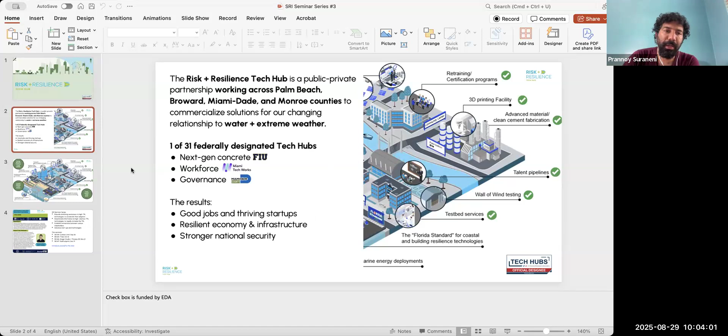Broadly speaking, we work on next generation concrete, workforce, governance, although it's like trying to do your entire thesis in 3 minutes. We are doing a lot of different things. I'm not going to go into details of all of that, but feel free to reach out to us and I'm happy to tell you. Ultimately, this is going to result in economic development, good jobs, many jobs, thriving startups, resilient economy, resilient infrastructure. It's going to result in stronger national security as well.

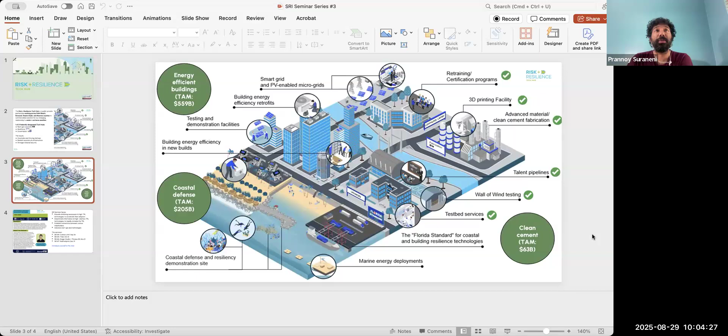What are the areas that we're working on? Broadly speaking, the Tech Hub is interested in energy efficient buildings, in coastal defense, and in clean cement. And as you can see, this is an entire ecosystem here, going all the way from into the water to significantly into the land, and the details of the many things that we are interested in doing are here. If this is something of interest, something that you want to support, something that you want to take part, please let us know.

The objective of this seminar series specifically is to educate and bring awareness to high TRL technologies so that their adoption can be accelerated. It is to disseminate information on both high and low TRL technologies to increase the TRL. It is to establish connections between the various stakeholders, right? All of you on this call, and to advance startups and technologies that enhance national defense, enhance resilience, all of that for the region, but ultimately for the rest of the United States as well.

So these are the rest of the seminars. I'll provide more information about them as the time comes. But for now, and I realize I have an old version of this here, I apologize. Title here is not the title of Charlotte's talk. But Charlotte Hoffman, who leads strategy and innovation at Kind Designs, is going to talk about their living seawall system and how the system restores marine habitats while protecting coastal communities.

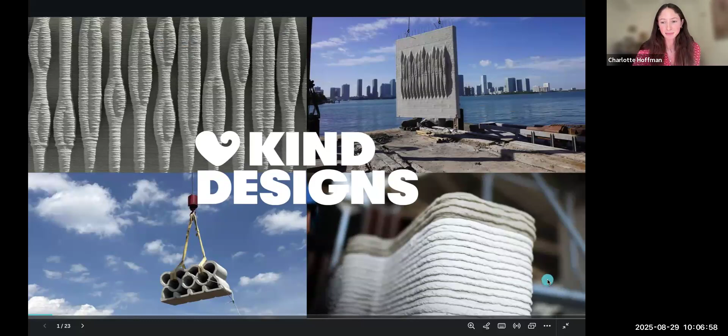There we go. Okay, so we got started about 2 years ago with the goal of creating a global scalable solution for climate change, sea level rise, and flooding. And the first things that we looked at were existing solutions of how coastal communities are traditionally combating these issues. And of course, we looked at seawalls being the first man-made defense between land and sea, typically in a coastal urban environment.

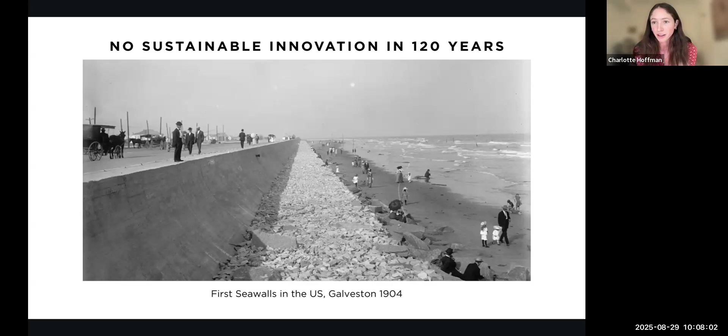And what we found is that seawalls all have the same kind of two problems. One is that they reflect wave energy, and so it leads to scour and erosion at the base of the seawall and overtopping of water behind the seawall, which both create structural issues and can potentially lead to premature failure of the seawall. But then two is that they destroy marine habitat.

So you're replacing what would be a dynamic coastal ecosystem in South Florida, maybe a mangrove forest, with just a flat wall that can never hold the same amount of biodiversity and life that a natural coastal ecosystem could. And the White House did a study and they found that within the next 15 years, so 2040, we'll actually be replacing about 50,000 miles of habitat with seawalls.

And that's a huge deal because there was actually a University of Miami study that was looking at seawalls and their impact and found that when you install a seawall, you lose 45% of the biodiversity within 1 year of installation. And that has a compounding effect because as you destabilize the ecosystem, it becomes harder and harder for it to recover.

So with the projected seawall construction happening in the next 15 years and obviously continuing after that, and the impact that has on biodiversity, we wanted to create something that could function, one, as a better seawall structurally and better protect communities, but also that could better protect the environment, since right now seawalls don't seem to be going anywhere. So that's when we came up with living seawalls. What if we can create a seawall that can actually house marine habitats and also provide some more structural benefits than a traditional seawall as well?

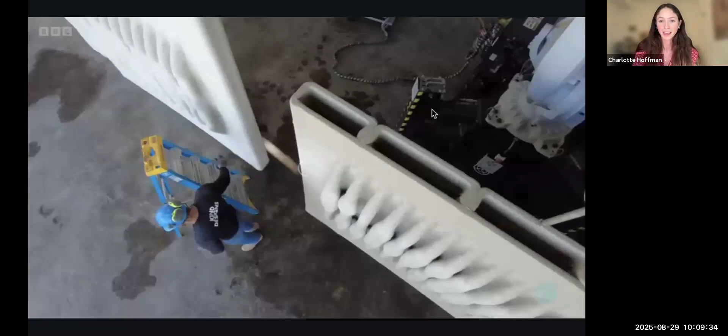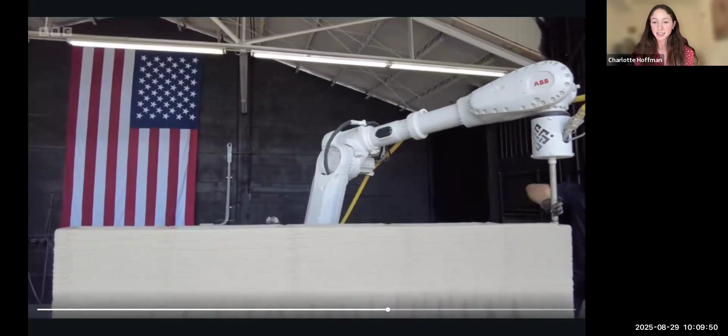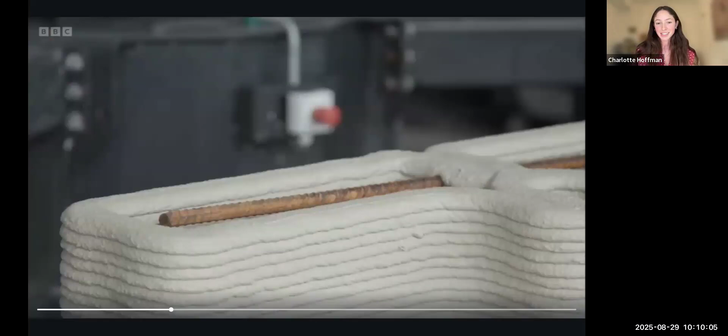So here's an example of us 3D printing one of our living seawalls. The method of manufacturing was chosen purely based on what our goals were. 3D printing allows us to create extremely intricate and unique customized designs. We wanted to take a biomimicry approach, again, to mimic what the natural coastline might offer in terms of habitat. So this is an iteration of our mangrove root design for any of our South Florida projects, but bringing our technology to other regions, other states, we can do a totally different design that mimics that natural coastal environment.

So obviously with new technology, a lot of times the hardest thing, even if it's a great idea, is just getting adoption. So we were really focused on how do we get everyone to start using living seawalls and replace all toxic traditional seawalls with a living seawall. And the way that we thought about doing that was just to fit into the existing regulatory and permitting environment.

So just on the regulation side for seawalls, we obviously looked at the building code and said, okay, what are the specifications and requirements, mainly having to do with the strength of the concrete and rebar placement. And so our seawall, we 3D print the exterior, which you saw in that video. We add rebar in the interior, and then we fill it with traditional ready-mix concrete that all marine contractors use to pour for a traditional precast concrete seawall. So right away, we can fit in with the existing building code.

Again, with 3D printing, it's totally customizable, so we can match the exact dimensions that an engineer specifies for the project. We can change the rebar in the interior to match the project specs. And then the material we're using is also not necessarily novel at all. It's a 3D printed extrudable mortar. It's a 5,000 PSI mix. So at the end of the day, it's quite similar to a traditional seawall.

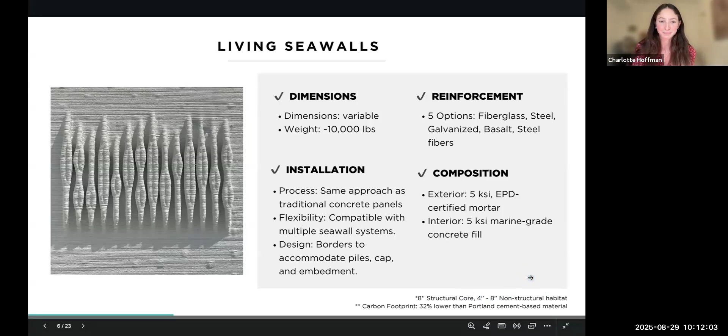Instead of using wooden formwork to form and pour a precast slab, we kind of create this quote unquote formwork with the 3D printed exterior and then fill that with your traditional ready mix. So really fitting immediately into the building code so that at least you can permit this project. And then again, on the permitting side, because we fit into the building code, something I'll talk about a little bit more in a second is that in Miami, up until about a month ago, 2 months ago now at this point.

It used to take 2 years to get a seawall permit. We actually just passed some legislation that has since changed that to 90 days. But as a company, we're only 2 years old and we have 9 projects in the water. If it takes 2 years to get a permit, how is that even possible? It's because we can customize our product to meet the exact dimensions of plans that have already been permitted without needing a modification.

So this is just an example. Obviously, these are some engineering plans with a lot of words on the screen, but just to show you, on the left side, we have the original permit of our first project that we did in Miami Beach. On the right, it's the shop drawing that we submitted. Since they're both concrete, it was a one-to-one swap, just a plug-and-play solution. And the homeowner didn't need to apply for a new permit to install this. So we installed this seawall literally just 4 months after we got our first robot.

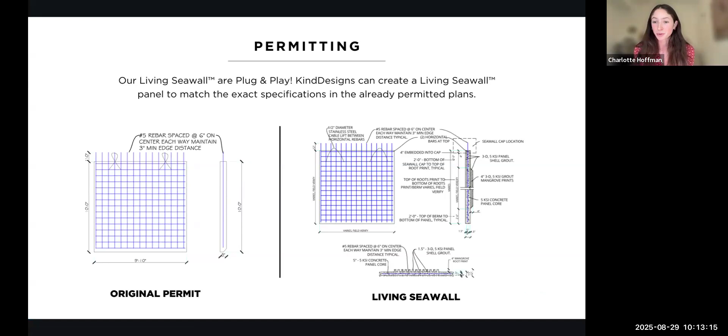And then lastly, again, to help with adoption, we needed to make sure that installation was exactly the same. The marine contractors having buy-in to our product is hugely important because at the end of the day, you typically buy a seawall from a marine contractor, but now you'd be buying it from us and they would be doing the installation. So we really wanted to make the marine contractor's life easier, one, by just making the panels ourselves.

Right now, it takes a long time to get a concrete seawall because the manufacturing process being horizontal versus vertical just limits how many panels you can make at a time, especially if you're forming and pouring panels on site. There's typically not a lot of room if it's not a commercial or government project to actually pour panels on site. And then you have to let them cure for 28 days.

But with us, we can actually just 3D print this wall in just an hour for a 10 by 10 foot seawall panel, which is your typical size in Miami-Dade County, and then fill it 24 hours later. So we have enabled contractors to actually complete a lot more projects because there's not as much waiting time to actually precast these panels.

But then again, on the installation side, it's the same exact installation as a traditional precast concrete seawall. They don't need to get any special equipment to be able to install our precast concrete or our 3D printed living seawalls. And you can use the same exact installation methods: king and batter piles, tiebacks, deadman anchors, helical anchors. So again, really just making it as easy as possible for people to adopt this solution without needing to necessarily change regulation, even though we also did that.

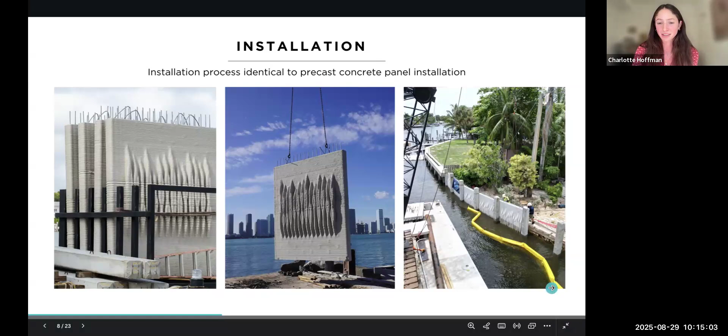So here's just an example of a project being installed. This was our first project in Broward County. This is in Fort Lauderdale. We actually presented to the Marine Advisory Board, and one of the women at the meeting needed a new seawall. So this happened about 8 months later, which is awesome. Another project is our first project in Miami Beach. You can see here.

So the other part of adoption is obviously, with new technology, proving that it works. And so that's where academic partnerships have been extremely valuable to us. So we've done a lot of work with UM and with FIU. Here you can see photos from monitoring that we've done, and this was all with FIU, with Alastair Harborne, who's on the call, and PhD student Emily Jackson, who have done an amazing job diving at 3 of our walls every single month, and taking amazing footage of the sites and fish that are in the area.

So just on the design side, how do we actually attract more species? One, we have the microhabitat, which is the rugosity created by the 3D printing process. So we create all these textures that you don't get on a normal, smooth, flat seawall, whether that's concrete, vinyl, or steel. And so just that texture allows organisms to actually anchor onto the wall, which you can really see on this photo. At 12 months, we have sponges, mussels, and oysters growing here.

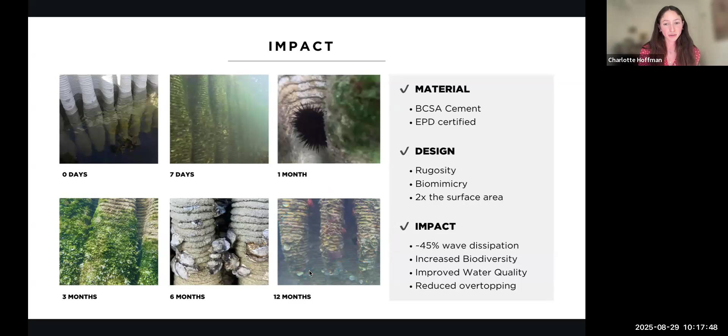So a flat wall will actually reflect nearly 100% of the wave energy. We sent our walls to the University of Miami's SUSTAIN Wave Tank and worked with Dr. Brian Haus, who is the director of the wave tank. And we did some tests mimicking waves that you would normally find in Miami, in the intracoastal, in the open bay, wind and wave wakes, and simulated these conditions with a scaled down version of our walls and found that, on average, we were able to dissipate about 45% of the wave energy. And that was with our most conservative design.

So we can change the size of the mangrove roots, again, 3D printing, customizable. So we sent our smallest mangrove root design, which is only 4 inches. It's barely anything. But even with just that 4 inches of roots and texture, we were able to have a really big impact. And so now we're working together to refine that design even more so we can improve those results.

And part of that refinement has, we won a NAVSEA SBIR, so a federal grant to work with the Navy. And we've been working with the Naval Research Laboratory, who redid this testing and was really interested in our seawalls, not just for the ability to dissipate wave energy, but because that means you could potentially reduce sea spray aerosols, which would also reduce atmospheric corrosion, which can be a huge problem at a military base. So we've been doing some testing with them, and we're really excited to debut some new designs in the coming months that wouldn't have been possible without working with University of Miami, Naval Research Lab, and FIU.

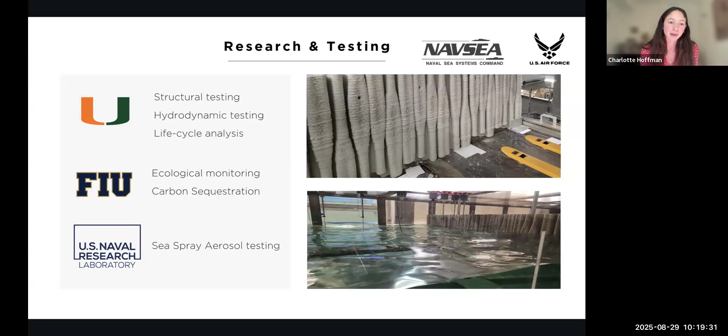Oh, sorry, repeat photo, guys.

Okay, so I'll just leave this up here, but with all these benefits, we have been able to actually change legislation, having proof of these benefits with our academic partners. So as I talked about, traditional seawalls reflect wave energy and destroy marine habitat, so you typically have to mitigate for your seawall on top of paying for the seawall itself because of those negative consequences. Because our seawalls incorporate the benefits that you don't traditionally get, we have been able to change legislation to say that if you have a living seawall that meets X, Y, and Z criteria, you don't need to mitigate for your seawall.

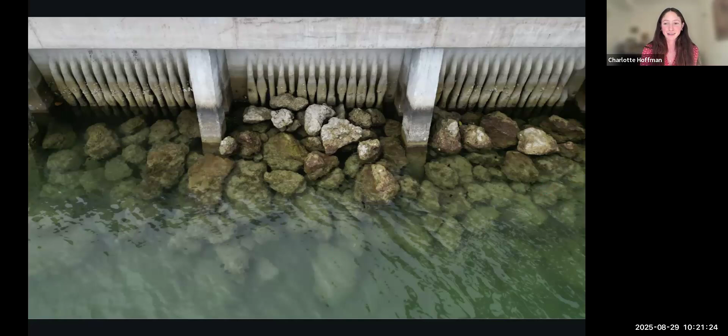And based on Miami-Dade County requirements, you have to have about a cubic yard of riprap for every linear foot of seawall. And it ends up being about $40,000 for a 100-foot seawall. And our panels are actually less than that for 100 feet of seawall. So we've been able to save homeowners a lot of money and also encourage people to choose a seawall that could function better for their property and for the environment over a more harmful traditional seawall solution. So it's exciting for everyone in the coastal space that wants to see improvements in our marine ecosystem and protecting our marine ecosystem.

Then the other products I just want to highlight, mainly because of the partnerships, and I want to emphasize how important that has been to us, is our Kind tiles. So these were designed specifically to retrofit an existing seawall and invented for this specific project at Bayfront Park in the town of Longboat Key, on the west coast of Florida. These are to cover a vinyl seawall.

Sarasota Bay Estuary Program did a study. It was, I believe, an unpublished study, but they were monitoring oyster colonization before and after they installed this vinyl seawall, and they found that it decreased by about 80% after the vinyl seawall was installed because nothing could actually attach to that wall. And so they put out this solicitation or RFP asking for a solution to their vinyl seawall without having to replace it, because it was so new, that could help encourage oyster growth.

So these were installed actually just about 2 weeks ago. We partnered with Kearns Construction, a marine contractor, and Cummins Cederberg, an amazing coastal engineer, and Sarasota Bay Estuary Program to create tiles that could retrofit this existing seawall. For this project, we also ended up going with a mangrove root design. They wanted something super natural. But again, with 3D printing, there's always the possibility to do something a little bit more custom.

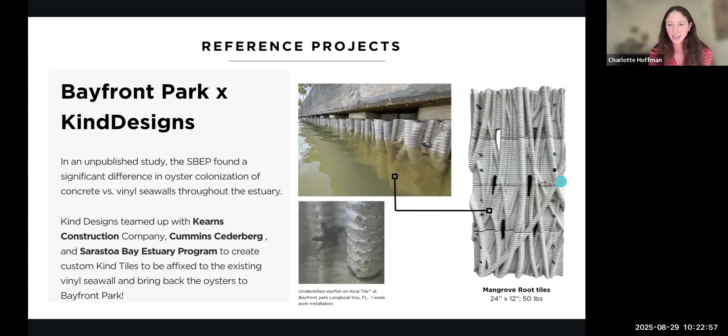And here is the finished installation. You can't even tell now that there was a vinyl wall. So it looks amazing, and I think it turned out really well. It's super exciting. And then the other partnership I want to highlight is actually our first project outside of Florida. This is in New York. We partnered with Billion Oyster Project, but our pilots in Florida and the Florida regulators being so open to this new product is really what has made our expansion possible. So we're so grateful for that.

Billion Oyster Project is one of the large oyster nonprofits in New York, and they have a goal of deploying 1 billion oysters by 2035, and have deployed many different types of oyster reef structures. But as that 2035 date gets nearer and nearer, they're looking for ways to set more oysters on a single structure without increasing size, and something that could really fit into their tanks and their current deployment methods. So we worked with them to create this custom oyster reef solution, which we're super excited about. In this bottom photo, it's really hard to tell, but all those little darker brown spots are oyster larvae settling on the oyster reef.

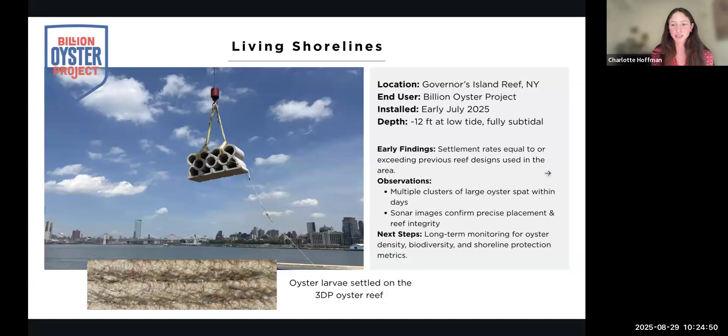And they saw amazing setting equal to or greater than their other structures, but they were able to work with us to customize this structure so that it could easily fit in their tanks and match the dimensions of things they've already had permitted in the past, again making it really easy to permit an oyster reef structure or a living shoreline structure, which can be notoriously challenging. So that was another really exciting partnership, and it also opens the door for us in the New York market, working with trusted partners.

And so here you can see, because we're creating a solution that can fit within the existing frameworks for coastal resilience and coastal construction, and are meeting the needs of what mitigation is trying to do, we've been able to get these incentives from regulators, but also other agencies encouraging this type of solution. So LEED v5 talks a lot about increasing biodiversity and climate resilience. WEDG is another certification, similar to LEED, but specifically about coastal design and waterfronts. And so we can help contribute to some of those points.

And then in Miami-Dade County, we have the 100% riprap reduction. In Broward County, we're working on that right now. The Fort Lauderdale project is our first pilot, which I'm really excited for Alistair and Emily to also be monitoring. And then we have some cities and towns that are actually giving permit discounts for this type of solution, as they're trying to encourage more living seawall, living shoreline type solutions to protect our amazing Biscayne Bay.